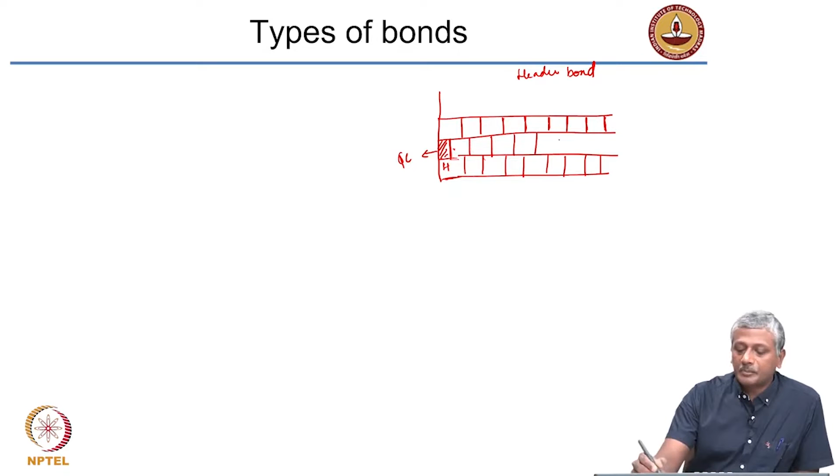One way to do the staggering is to have a queen closer at the end, and then I do the staggering. I easily get my arrangement of the headers. So that is what I will do to stagger the second layer, and obviously the fourth layer. This will again repeat in the fourth layer, and I again stagger my wall by exactly 5 centimeters, so that there is no overlap of the vertical joints. That is called a header bond.

Now these are obviously simplistic arrangements. So what you need to see now is, if you look at it in plan, all the bricks are arranged in this way.

So my thickness should be at least 20 centimeters. It is only for one brick walls. You can only have 20 centimeter thick walls with header bond. With stretcher bond, you can only have 10 centimeter thick wall. So it is not intended for a large load bearing condition.

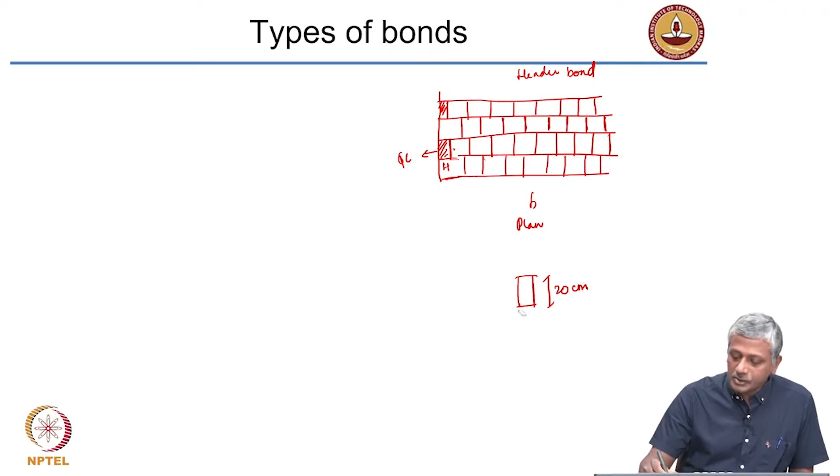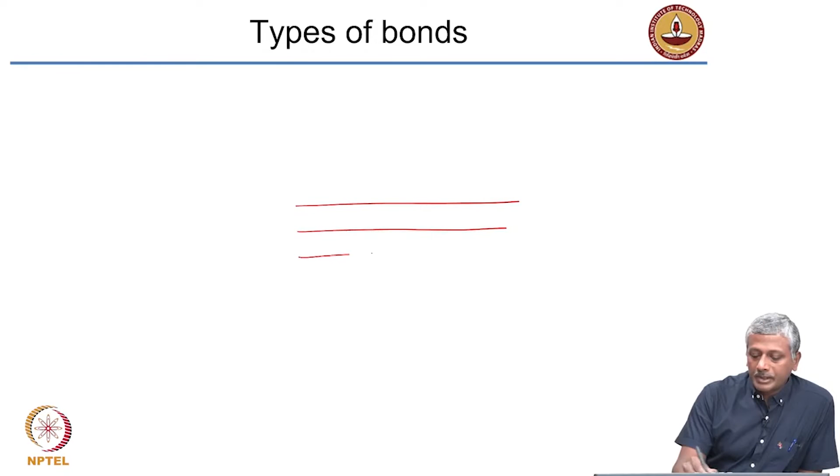Now let us look at the most important bonds that we typically use: the English bond and the Flemish bond. So what happens when we use English bond and Flemish bond? In the case of an English bond, every alternate layer will have only stretchers or headers.

Let me draw the running length of the wall. So let us say this is my stretcher course. My next has to be a header course. The headers should be arranged in such a way that they are like this. Then the third layer becomes again a stretcher course, and the fourth layer again becomes a header course.

So that's called a header course. This arrangement is called an English bonded wall. That is an English bonded wall.

Now what if I want to finish this wall here? Let us say I want to finish this wall here. With this last stretcher I am finishing this wall. Now you have an overlap of 5 centimeters here, that means only 15 is remaining here, right? You only have 15 remaining here. So how do I arrange that 15?

Typically what I will do is use a header here and a queen closer here. This is a header and that is a queen closer. I showed you this already in the previous drawing. So you have your stretcher here, that is the header, and that is followed by a queen closer. The queen closer ensures that you get this shift in the bond by 5 centimeters.

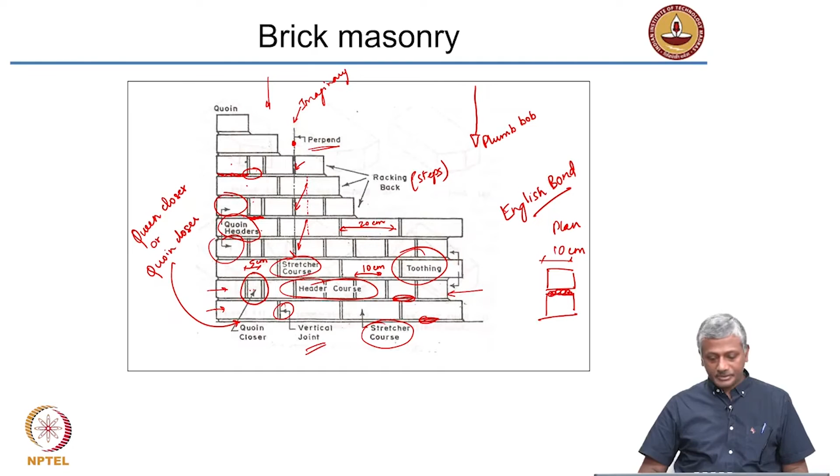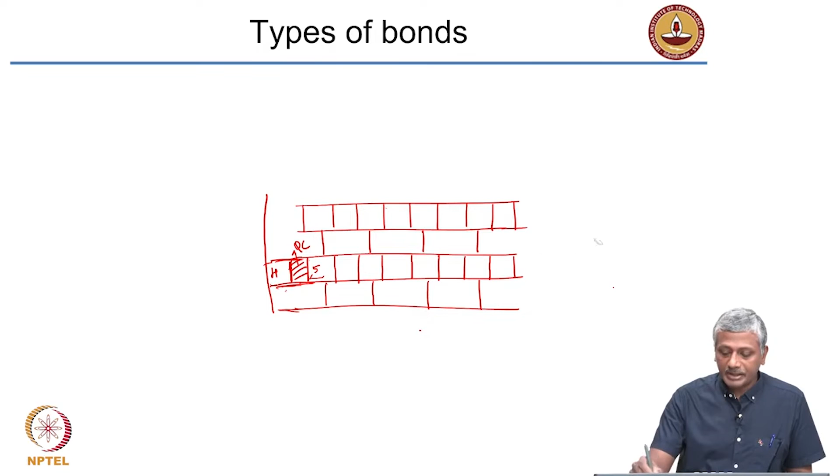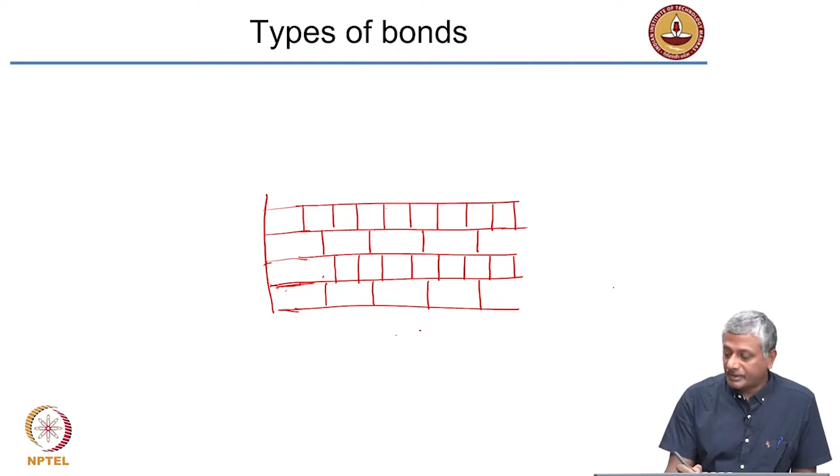Now, if you consider the case of a Flemish bond, in that case we actually get each layer having a stretcher and a header. So let us again draw the same arrangement. I want to now have a condition in which each layer has a stretcher and header. So I will draw again the running length of the wall, that will be much easier for you to understand.

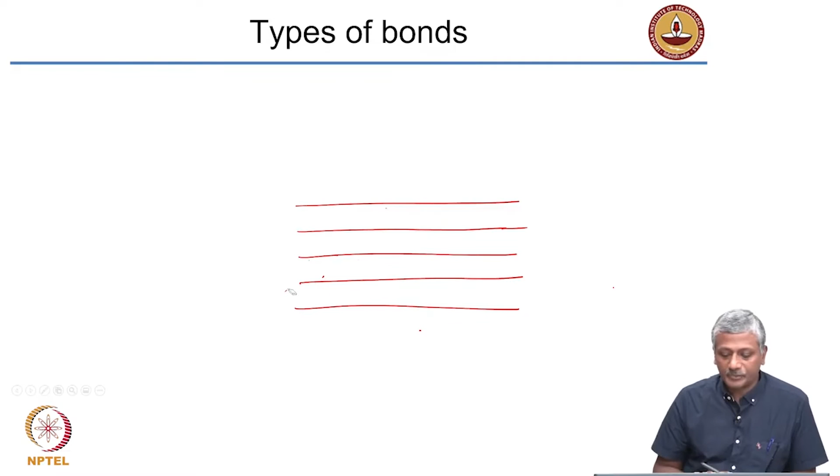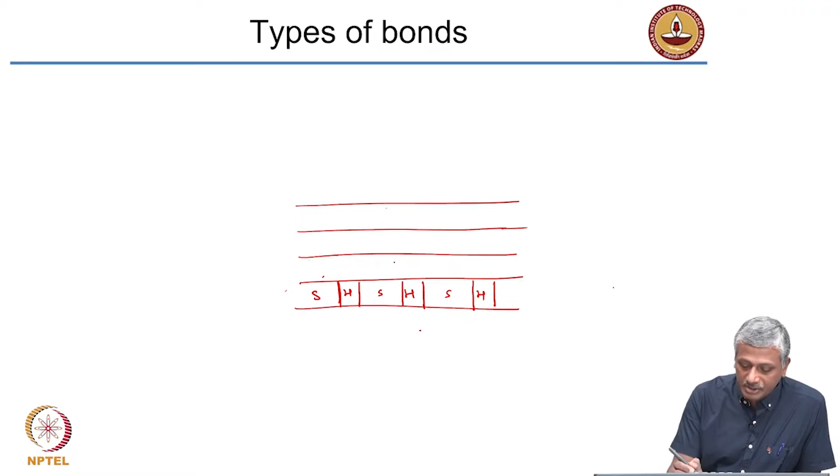So let us say I have a stretcher here, my first brick is a stretcher, this is followed by a header, then I have a stretcher, then again a header, then stretcher, header, and so on. Now I need to ensure that my overlap does not happen in the next layer. So I need to have a stretcher exactly on top like that, and that is going to be a header, then stretcher, header, stretcher, and so on.

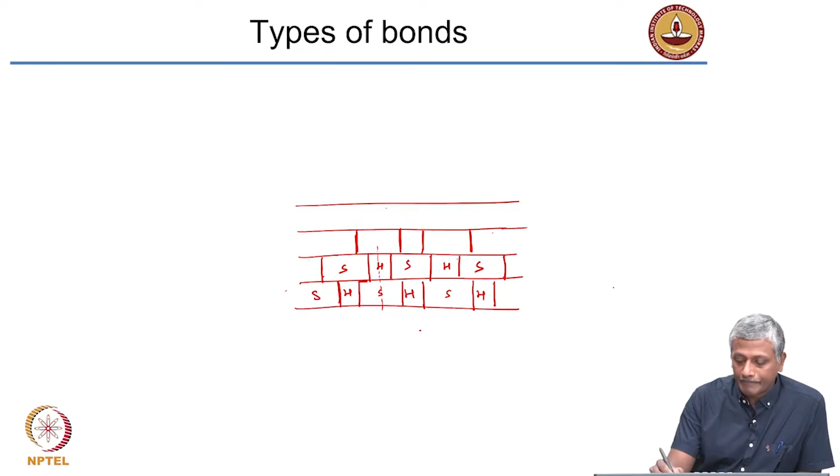Okay, so again I am satisfying the rules of minimum 5 centimeters overlap. I am also satisfying the rule that the center line of the header coincides with the center line of the stretcher below it and also above it. So next layer will again be a repeat of the same layer. This gives a very nice pleasing aesthetic appearance.

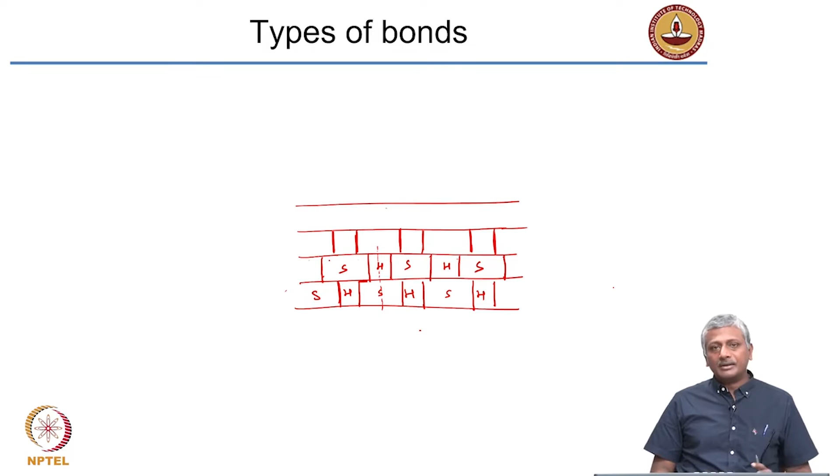The problem is when you start coming to the end of the wall at the corner, you will have to make arrangements using brick bats, and that is a little bit difficult, because when you start putting brick bats in it, you increase the amount of mortar available, and that causes the wall to be weaker. So Flemish bonds are generally weaker than English bonds, but nevertheless they are most aesthetically pleasing.

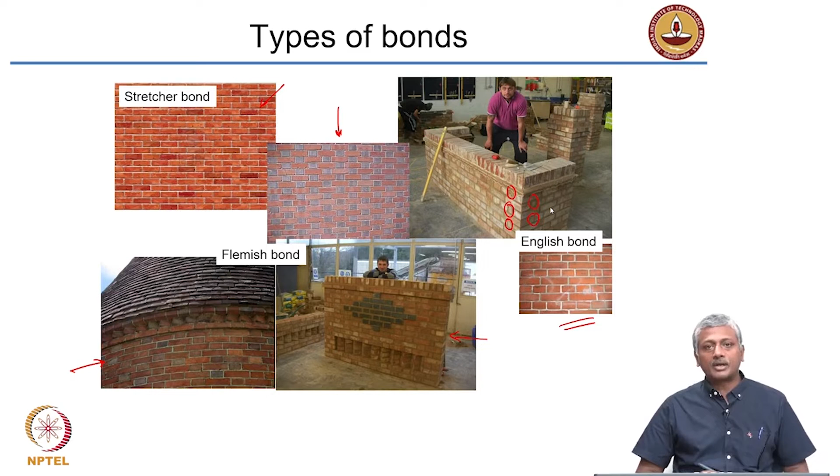Okay, now from stones and brick, let's now take a look at concrete. I am not going to talk extensively about this, I will talk about concrete as a material later, but I just wanted to give you a flavor of what type of bonds or what type of blocks are actually available.

Now concrete itself, the other advantage is that you can adjust the weight of the concrete by introducing elements in it which make it lightweight. For example, the lightweight units include concrete prepared with lightweight aggregate. So instead of sand and stone, we start using pieces of rock which are very low density, for example some volcanic rocks like pumice and scoria, which are lightweight volcanic rocks and can reduce the density of your concrete, causing the blocks to be very light. So when you have a lightweight concrete block of the same size, you can lift it and easily place it, reducing the effort of the person.

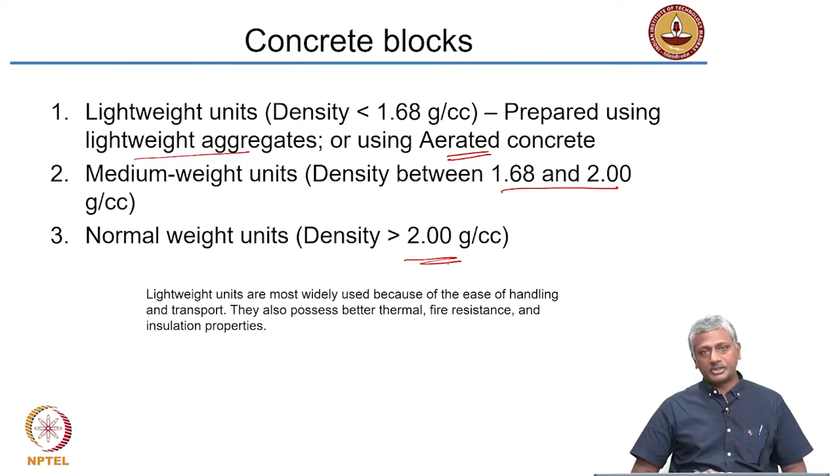Now the lightweight units are not only easy to place and transport, they are also much better in terms of thermal properties and fire resistance, because when you have a lot of porosity inside the concrete, it reduces the amount of heat conduction. Whenever you put air inside materials, it reduces the heat conduction.

How this is generated is by introducing aluminum powder into the concrete. What this aluminum powder does is it interacts with the calcium hydroxide available from the cement reaction with water, and this reaction generates hydrogen gas, which gets trapped inside the concrete structure like bubbles.

You might have also seen how bakers typically bake bread, right? They put yeast, which ferments and releases air, and that leavens the bread, causing all these nice pores to appear inside. The same process happens in the case of aerated concrete also.

And because of this, the block itself, which is quite large, now becomes quite easy to handle. In many construction sites, you will probably see blocks with the trade name of Aerocon, a common trade name for aerated, autoclaved aerated concrete blocks, or Renacon. Many of these blocks are used in different construction sites. These are just trade names, there are several others obviously which are used, but I have just given you some examples here.

In some cases, you can work with very stiff concrete and use block making machines, which extrude the concrete out and make these shapes of blocks. Or you can even make bricks with concrete, which are the same size as traditional bricks, but they are not made with red clay.

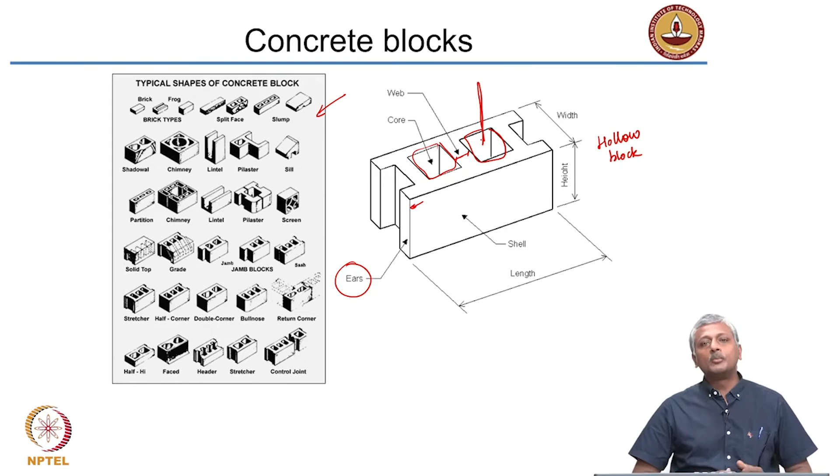The nominal dimension in a concrete block is taken in a similar way as in the case of a brick. Concrete masonry blocks are sometimes reinforced with steel. If you look at this hollow masonry, it gives you an ideal location to put your steel rod inside. The steel rod is held in place by putting some concrete or a flowable grout into it so that it holds the bar in place. So you can create reinforced concrete block masonry with a lot of ease, and this is very important, especially when you have lateral load problems in earthquake prone areas. Concrete block masonry is very good for reinforcing in earthquake prone areas.

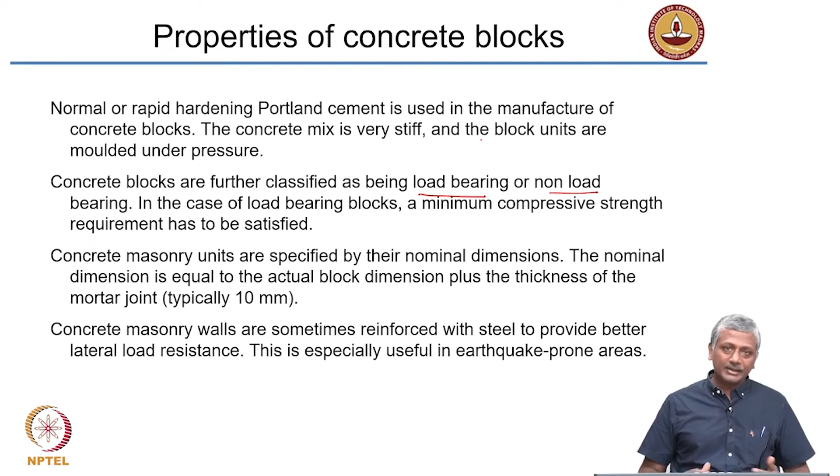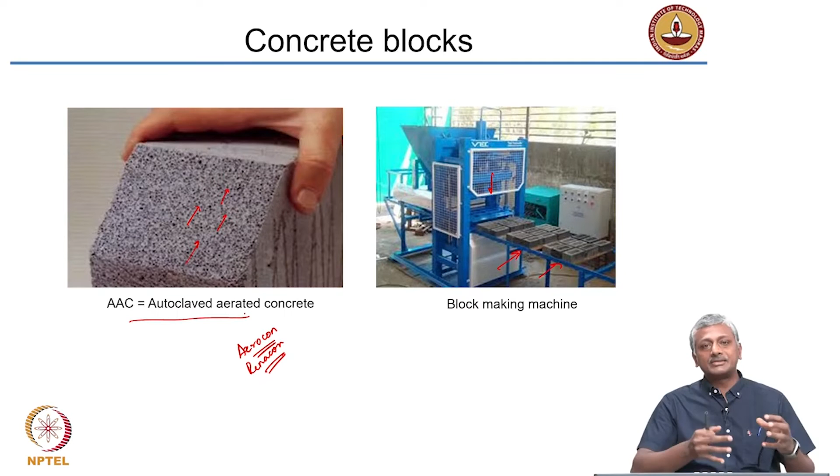You can also have foam concrete. Supposing, just for an example, you take shaving foam and mix it into the concrete. The shaving foam will lead to some stable air bubbles being formed inside the concrete, and that is what we do in foamed concrete. We introduce some sort of foam, not exactly shaving foam, but something quite similar - the chemical foams are quite similar to your shaving foam. You put that into the concrete and the stable air bubbles lead to a very highly porous structure. That is called a preformed foam cellular concrete.

IS 2185 basically covers the specifications and properties of concrete blocks of different types.

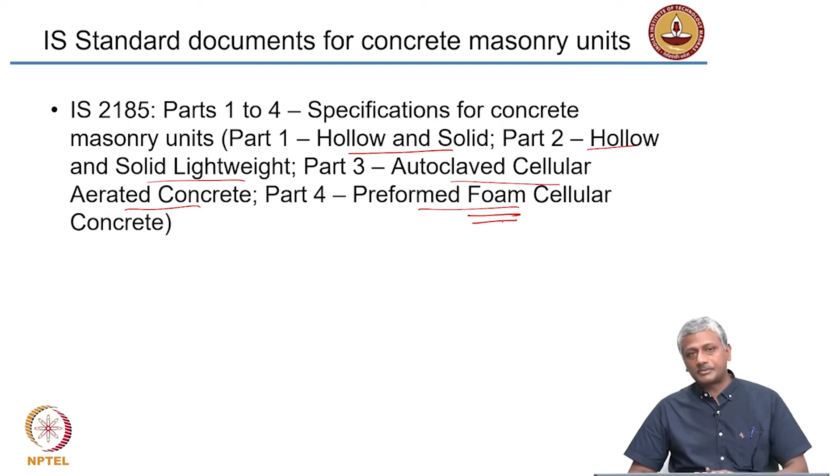Now, coming back to the overall process of masonry, you need to use pre-soaked masonry units or pre-soaked bricks, again to avoid the absorption of moisture from the mortar. The corner of the wall is constructed first and then you move towards the center. The level in each masonry course has to be maintained properly, and that is done using a string or cord held very tightly. Then you establish the verticality with a plumb bob and pull the cord tightly to ensure that each brick is placed exactly in a horizontal line.

The verticality of the perpends - imaginary lines joining alternative joints - is checked using a straight edge and square, the same tools you have used in your engineering drawing classes. That is exactly what we use to check whether you have a perfectly perpendicular or perfect lining of the vertical joints along the perpend. After the day's work, pointing is typically done to ensure that the mortar joints are cleaned up properly.

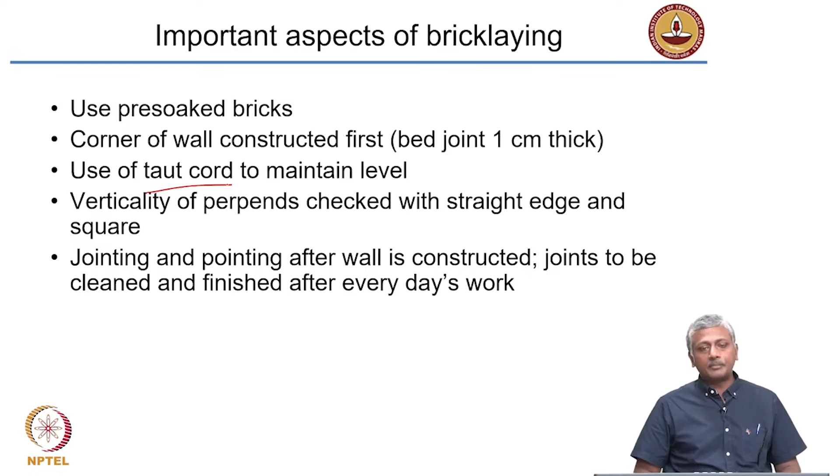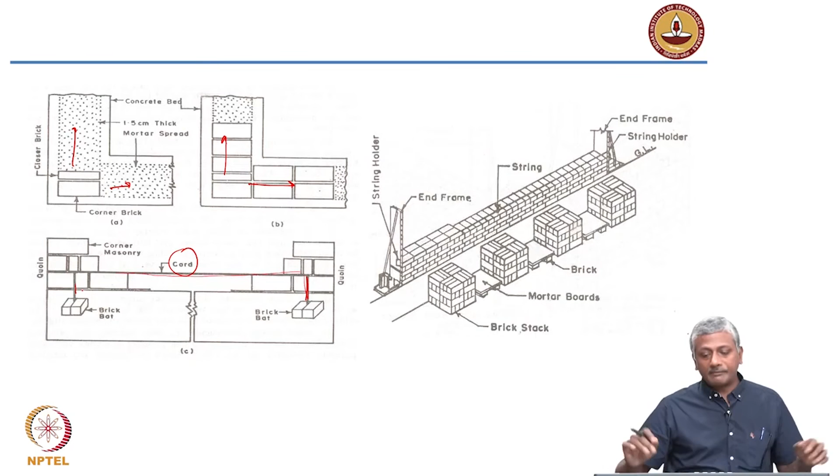This is an example of laying the bricks. You start from the corner and move towards the center, as shown in this picture. The horizontality is maintained by using a cord tied to heavy weights at the ends to ensure it is very tight and defines the horizontal level properly.

Sometimes people use frames at both ends of the brick wall, with strings tied at different locations in the frame. As each layer is constructed, the string is tied at the next level, so you can continuously mark the horizontal levels of each masonry layer.

These are the bricks stacked on the side. The mason stands here, picks up the brick and lays it. This is a typical arrangement for stacking many bricks together. In between are mortar boards or containers on which the mortar is mixed and kept, so the mason has easy access to the brick and can use the trowel to lift the mortar and put it in place.

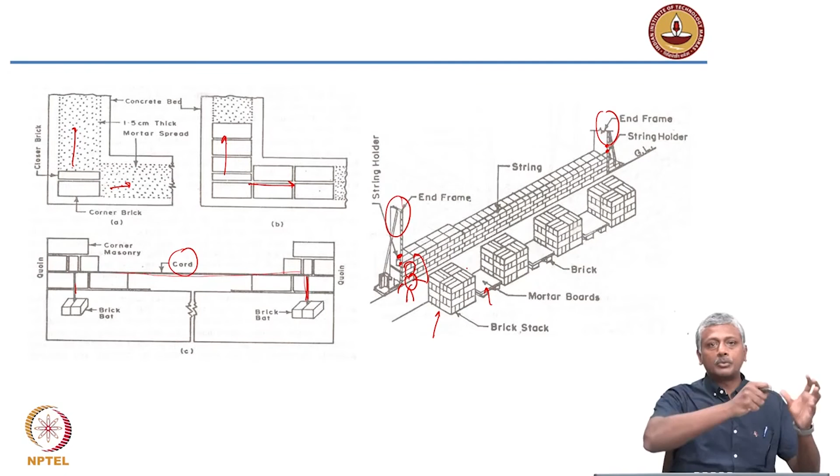Again, an example of the use of the taut cord. Here concrete block construction is being done, and the blocks are being laid. This cord is held in position by a simple arrangement using just a block as a weight. You have a taut cord that forms the level of the horizontal masonry units.

This person is checking the level of the masonry unit using a bubble spirit level, typically used in workshops. You may have used it yourself. The bubble spirit level helps check whether the blocks are aligned perfectly horizontally or not. Again, here you see an example of the taut cord being used.

This is the masonry wall being built slowly, and there is a nice video which captures this entire process.

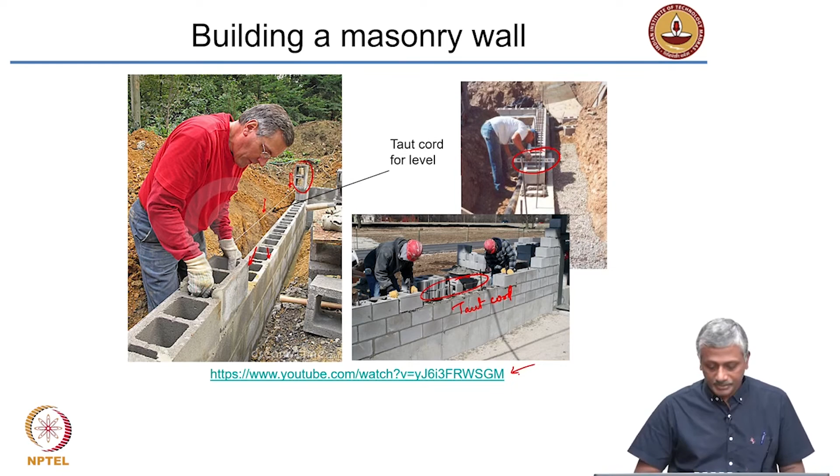When you use different types of materials, you may have to change your procedure. For example, with common lime mortar or cement mortar, the brick, stone block or concrete block has to be wetted before use. But when using fat lime or mud mortar, you do not have to soak the blocks, because the mud mortar or fat lime mortar does not give out water—it keeps the water within and does not easily lose it. Because of that, you do not need wetting.

The frog, the depression on the brick where the manufacturer's name is, is typically laid on top while laying, just for uniformity.

In thick walls, it is possible that you may not be able to have proper jointing between the bricks, and many gaps may be left over. In such cases, at the end of wall construction you have to do grouting to fill up those gaps. So in thick walls, we typically do joint grouting.

The brick wall is uniformly and continuously raised upwards, or if we leave off for the day's work, we leave behind steps or toothing.

Another common feature in most masonry structures is the use of expansion joints. This is important because a long running wall, subjected to daily temperature changes, expands when heated and contracts when cold. When temperature increases, the wall expands; when it reduces, the wall contracts.

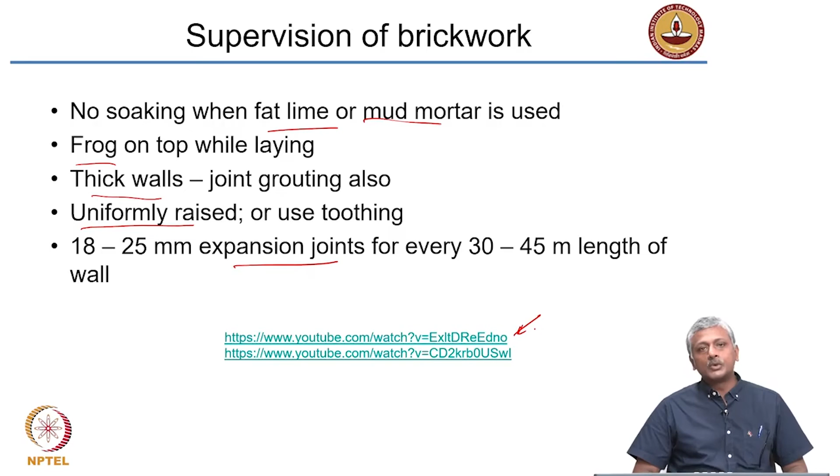Again, these are some nice videos you can see of brickwork type construction being done. There are several such videos, and obviously I can't list everything here in this chapter. You can do a search and find more effective videos than this also on the web.

Now, expansion joints are not only provided for running length, you may also want to provide them wherever you are seeing openings, like window openings, because one common feature you will observe in your own house is that many cracks emanate at corners and wherever the openings are. So to avoid such cracking and failures, your joints may need to be provided over such regions.

All you are simply doing is providing some free movement of the different structural components in your construction. So, those are some examples.

Expansion joints are also provided between materials which may be different. For example, you have a brick wall and then a slab made with concrete. In such cases you want to allow the expansion of the brick wall and the expansion of the concrete at separate rates, because concrete and brick are different materials. The brick wall may be expanding and contracting with a different coefficient of thermal expansion than concrete. So whenever you have dissimilar materials, you may also want to locate your expansion joints.

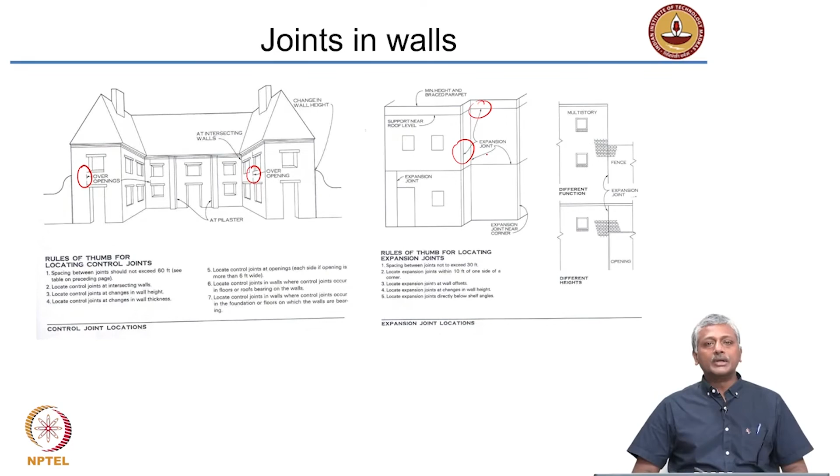There are several rules for this, though it's not something that is part of this course. I just wanted to give you this information so that next time you observe your own house, you'll start locating these aspects.

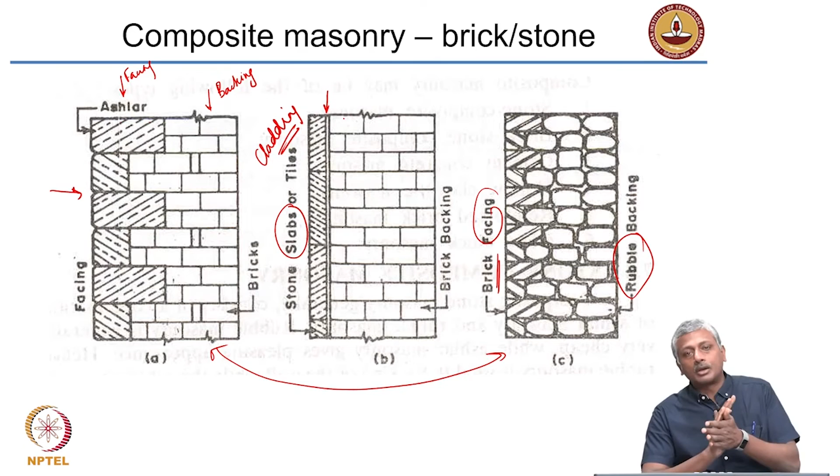This is the opposite example of the first one, where the actual masonry is in stone or rubble and you have a facing made with brick. All kinds of arrangements are possible. All you need to do is ensure that whatever facing material you have is properly embedded into the backing or properly glued. When using stone slabs or tiles, they need to be glued to the surface of the brick wall, and this glue is basically mostly made with cement based materials.

When we talk about composite masonry, we simply mean more than one type of material is used—it could be stone and brick, or stone slab and brick. But more often than not, composite masonry refers to reinforced masonry, where we put steel inside to introduce much greater tensile resistance, since masonry materials, like concrete, are good in compression but weak in tension.

How do you put steel inside masonry? One way is to put it in the joints—you use steel in joints, hoop iron, or meshes in the joints, but that only works in the horizontal direction.

What about a wall standing vertically? It's subjected to high wind or earthquake forces, horizontal forces, and the wall will try to bend in that direction. So to reinforce the wall against this, you need a vertical steel bar which helps resist bending. In such cases, you need gaps in the masonry where the rebar can be inserted—for instance, special bricks have these gaps inside where the bars can go.

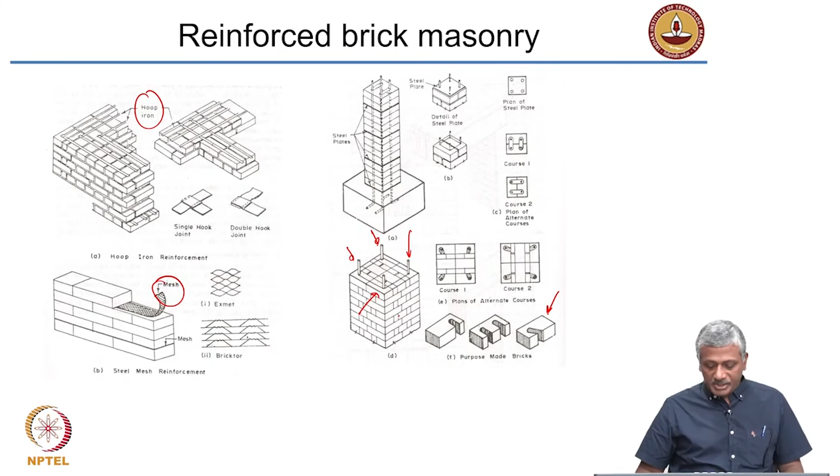This becomes much easier with concrete, because concrete can be made into hollow blocks, and these hollows provide ideal locations to insert the bars. Once inserted, the bars aren't big enough to completely fill the hole, so you need to keep them in position by grouting—putting a grout to hold the bars in place. That is basically reinforced concrete block masonry.

Reinforced concrete block masonry can also have horizontal steel, but mostly we talk about vertical steel members that impart lateral load resistance for the wall. In real construction, you see blocks where steel is inserted not in every cavity but in every third cavity—you don't need that level of lateral resistance, but you calculate the resistance required and provide it only in every alternate or every third cavity.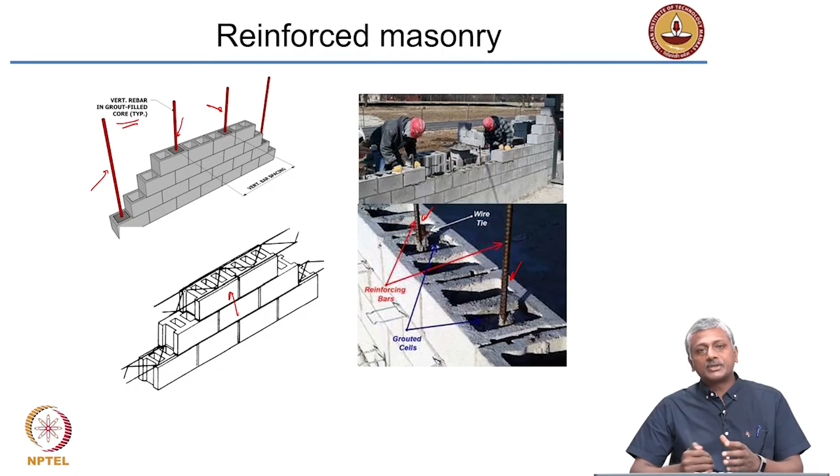These are all grouted to ensure the material is in place. Grout is nothing but a flowable mortar which fills up the gaps and hardens so the steel bar is kept in place. Here's another example of reinforced concrete block masonry—not reinforced concrete, but reinforced concrete block masonry—where the cavities with reinforcement are marked quite nicely.

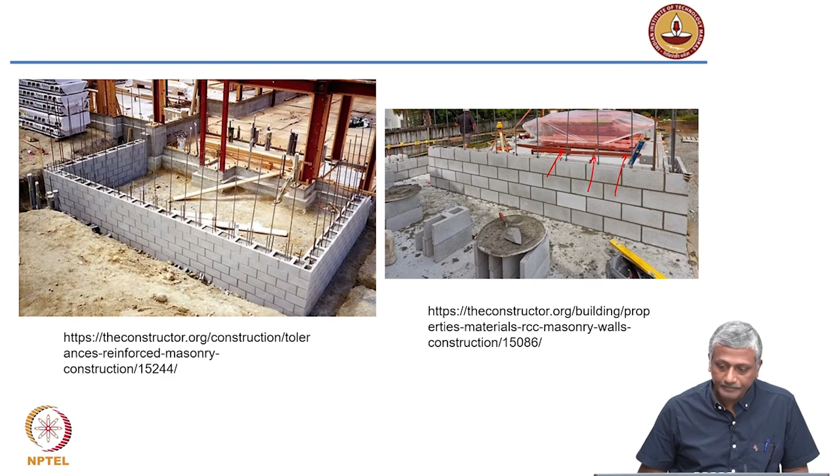Coming back to plastering, after the wall is completed, you need to do plastering. Older structures used lime mortar, new structures typically use cement mortar. Generally, plasters use ratios like 1 part cement to 4 parts sand, or 1 to 6, depending on the consistency or strength of plaster required.

In plaster, strength is not all that important. However, interestingly in our country, strength of plaster seems to be given a lot of importance—because when you nail or drill into the wall, you don't want the plaster to fall off or chip. So some level of strength is required to handle drilling and nails. But sometimes people do random tests, like striking the surface with a hammer, which isn't a good idea since plaster isn't supposed to be a very strong layer.

Because of this, people have started making plasters as very strong mortars, which isn't a good idea—you have to make plaster as a weak mortar, because all it has to do is cover the top surface, reduce efflorescence, and provide a level surface. There's a good example of videos from the company Ultratech, which manufactures cement, covering basic construction practices including plastering.

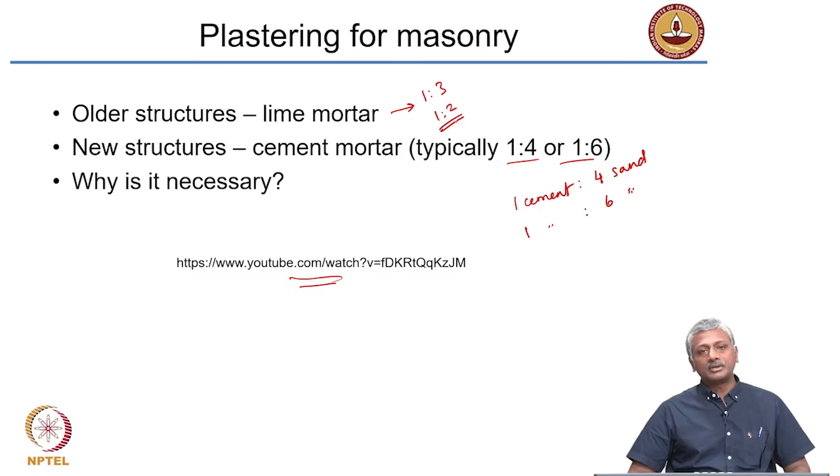The ratios of 1:4 or 1:6 are in terms of volume, not mass. Even in cement, and also in lime, typical ratios are 1:3 or 1:2—you need more lime availability to get some minimum strength of mortar compared to cement plaster.

Okay, so we have looked at masonry materials and how these are combined together to make masonry walls. I just wanted to give you a brief idea about how you should consider the design process of a masonry wall. First of all, what are the walls there for in a building?

They provide strength and stability, obviously. Walls provide resistance from the weather because ultimately they are protecting you from what's outside. So in cold countries, this would mean that they keep the interior warm. In warm locations, for example like in southern India, the walls ensure that the heat from outside does not easily get into the inner part of the building. Then they also provide durability to the structure, fire resistance, and thermal and sound insulation.

Now, based upon the amount of load they carry and where they are placed, they can be called load bearing walls, which are actually getting the superimposed load from the top. The wall is bearing the load that is coming from the top and its own self weight. In the case of non-load bearing walls, they have to bear only the self weight.

In most cases, these non-load bearing walls are used as internal walls, that means they are in between the outer walls of the building, which basically make up the more load bearing components. The inner walls are not really doing that much of a load bearing thing. The outer or external walls, which are non-load bearing, are basically the panel walls or infill walls.

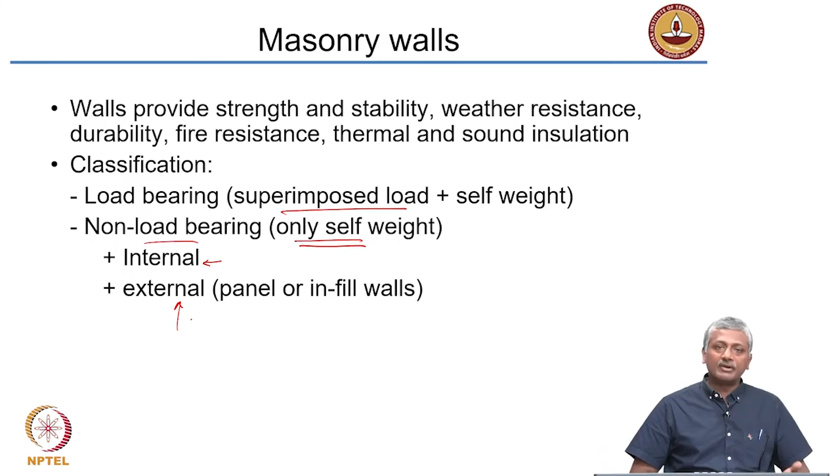A partition wall could be a load bearing wall. The function of a partition wall is simply to partition two spaces. If you have a very large hall, for instance, you put a wall in between called a partition wall, which partitions two spaces.

Now, the partition wall in some cases can be designed as a load bearing wall also, but in most circumstances you will see that the partition wall is a non-load bearing wall, typically made with lightweight concrete masonry units. A party wall is a common wall between two buildings, like you have row houses, right?

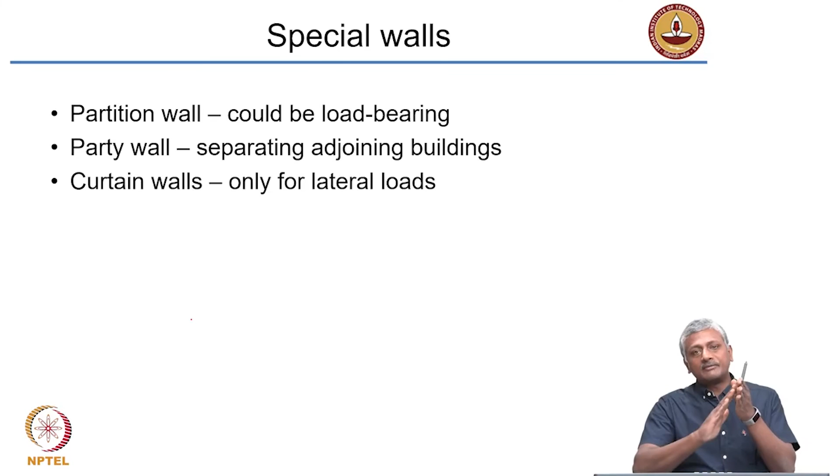When you have row houses, commonly every two buildings typically share at least one common wall, that is called a party wall. And in some cases, in front of the main structure, you have these walls called curtain walls, which are sort of protecting the structure against lateral loading. So all these are examples of different types of walls that you will see in construction.

Now, the load bearing walls themselves, as I said, need to provide resistance to the load of the superstructure that is there, and then transmit this load down to the foundation. At the same time, they should also ensure that the weather inside is nicely protected from the conditions outside.

So for that, we don't always use solid brick walls, we sometimes may use these compound walls where brick and stone are together. But more often than not, we will use cavity walls where the cavity or air gap inside will tend to reduce the transmission of sound and heat into the building.

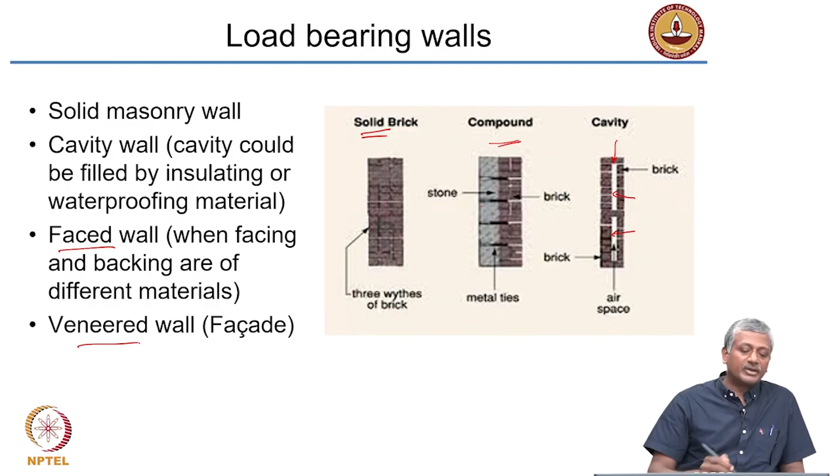So there are other examples of load bearing walls also. A faced wall, where facing and backing are different materials, like composite walls or compound walls. Veneered walls, where you use a facade. I showed you earlier about a veneered wall which can be made with modern materials where you had a concrete block wall and there was an air gap and some barriers, vapor barriers and all that.

Then there was a veneer or a facade which was made with a brick wall. So all these are examples of different types of walls. Now, how do we design these walls?

Obviously, we want to design the walls to take up the loads coming on top. To ensure the load distribution is uniformly given to the foundation, we want to avoid any concentrated loads coming onto the walls, because concentrated loads cannot be taken effectively by walls. They need to have well distributed loads.

Secondly, we want to avoid large openings. If we have a very large window opening, for example, you have a wall like this, and I carve out a window in between like this, that means this part of the wall now is unsupported. Where does all this weight go?

Typically in our construction, what we do is use a lintel on top, made with reinforced concrete, to take the load of the material above it. But we want to avoid such openings because the requirement of the lintel becomes more stringent in terms of load carrying capacity as you keep increasing the span or size of the opening.

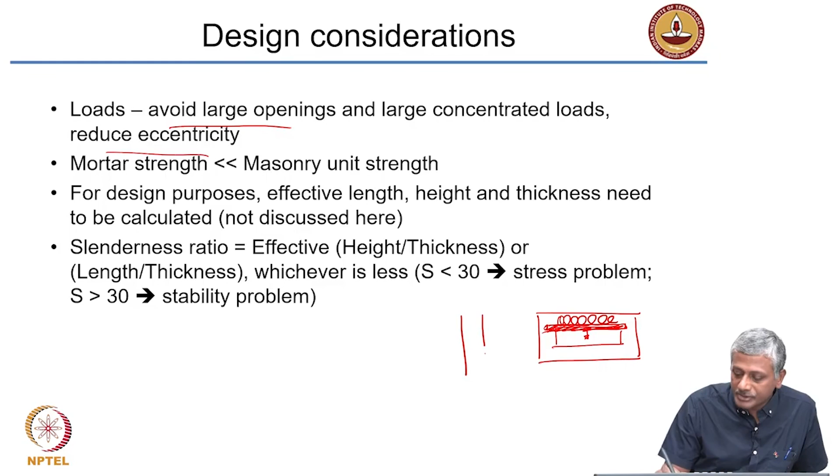We want to reduce eccentricity. When the loads come onto the wall from the top, as far as possible they should be axial and not produce any bending of the wall. If I take the wall cross section like this, the load coming on top has to be exactly in the central axis of the wall.

If the load is on one side, if it's eccentric, it's going to cause the wall to bend. And when that bending happens, you will get tension on one side, and the wall is not able to take tension. So you have to reinforce it to be able to take that tension.

Again, mortar strength is typically much lesser than the masonry unit strength, because mortar failure will lead to a slow and steady failure of the building. It won't lead to a sudden collapse.

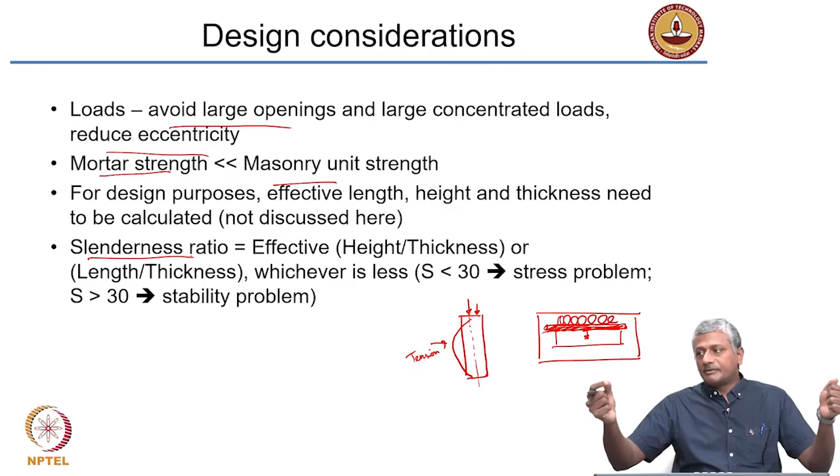For design purposes, we calculate the effective length, height and thickness to get what is called the slenderness ratio. If you think of a wall like a paper, stretched along the length, the length divided by the thickness of the paper is the slenderness ratio in the length direction. The height divided by the thickness is the slenderness ratio in the vertical direction.

A paper can be bent this way or that way. If the length to thickness ratio is very high, it will easily tend to bend along that direction; if the height to thickness ratio is very high, it will tend to bend vertically. So you want to control the design based on the slenderness ratio. When the slenderness ratio is less than 30, the strength of the wall governs the overall behavior, whereas if it goes above 30, the stability of the wall becomes an issue.

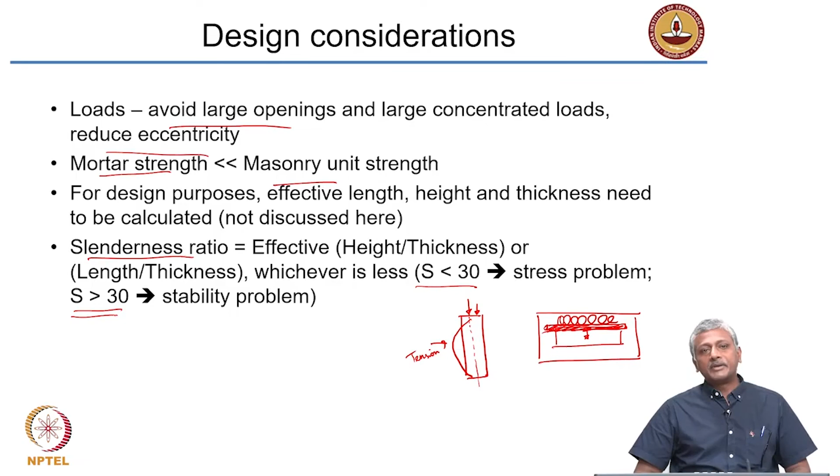So walls can be defined based on different ways. With that we come to the end of this chapter on stone, brick and mortar. As I said, these are traditional masonry materials which are used even in the modern era.

A lot of bricks and stones are giving way today to concrete blocks because they are much more efficient, easy to construct and easy to mold. Nevertheless, many of our ancient structures and many structures in rural parts of the country are still built with stone and brick, and one has to understand the properties of these materials in order to construct effectively with them.